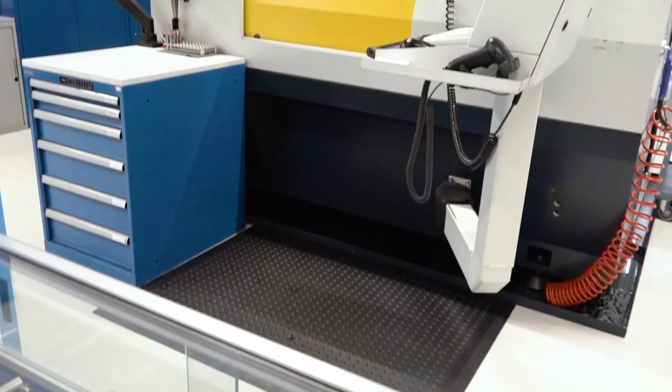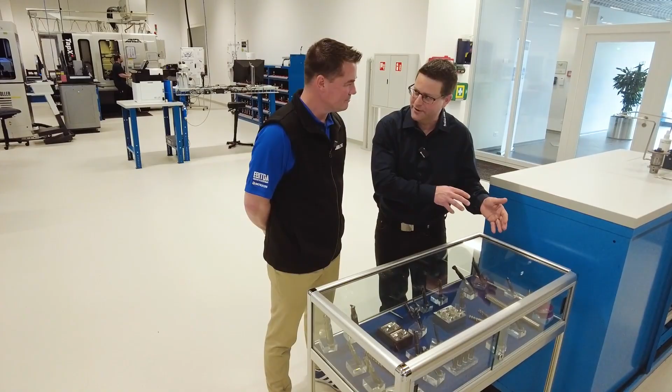I'm already seeing what looks to be dozens of grinding machines, which is the core of what you're doing here. Solid carbide is our passion for precision. You see different tools here, mostly different diameters and lengths, but more the bigger ones. So here it's really in action with powerful grinding technology on these Rheinecker machines. You see how we produce these tools: first there's always a rod, we put it in the machine's clamping system, then we go with the grinding wheel in a slotting process. The main material of the tool gets removed, and then finally we sharpen and finish the front part of the tool. The other ones with a lot of teeth are finishing tools. We grind such a tool for about 60 minutes - an hour for one tool. There are other ones we produce faster, but it's really different here.

I come from the machining world, and currently we discuss all the time about done-in-one operations and reducing cycle times. Are you doing the same thing inside the grinding machines - putting in raw material and taking out a finished cutting tool, doing your best to combine operations and cut cycle times, say from 30 minutes to 5 minutes? Are you doing all that to keep production up with demands, since you guys continue to grow globally?

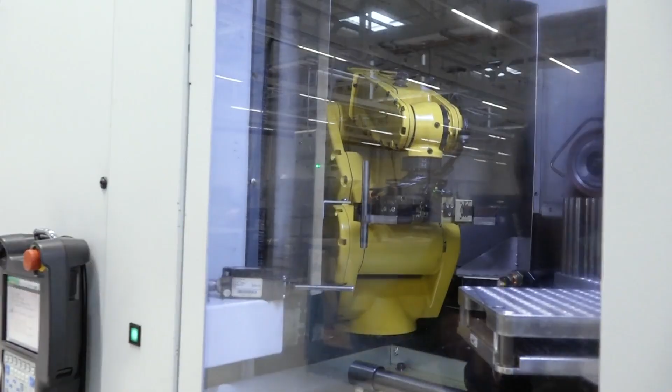Yeah, absolutely, it's important. We're standing here in the Switzerland production - the salary is part of the price to produce out of Switzerland. Most of our products go out to Europe, the United States, China - I have international competition. Producing out of Switzerland is expensive, so we have to optimize our process. Therefore automation is really important. When you look at a machine like that, you see the robot still holding the rod, prepared for its operation. At the back side we see the different grinding wheel packages. We've optimized during the last years not only the grinding strategy, but also the grinding wheels - the metal bonded wheels that we can dress with EDM technology. That's really important.

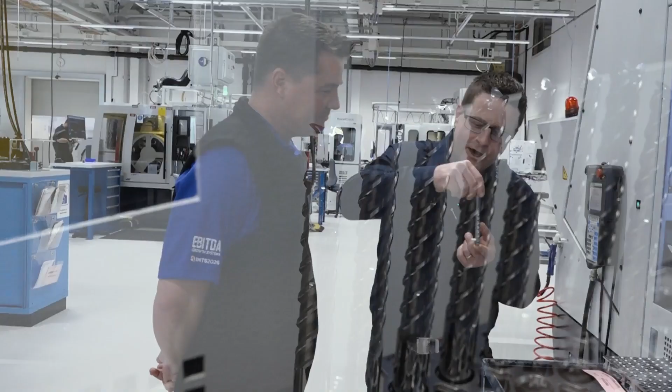It's really important that we are performant with our grinding strategy. Stefan, coming from a machinist background, in my younger days I would certainly hesitate to utilize this tool at full cut. But you would advise people to use the whole thing, wouldn't you? Yep, absolutely. And that goes into your strategies and quality as well.

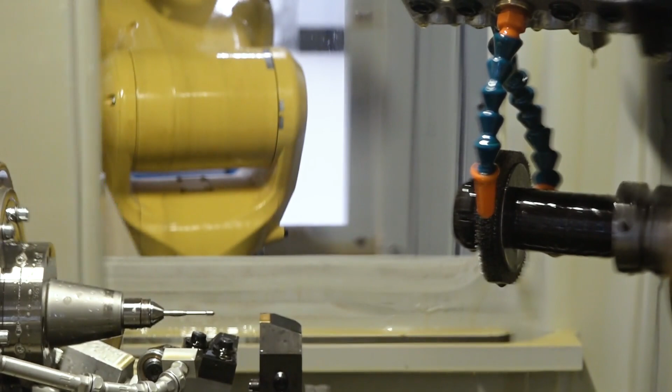The grinding part is one thing, Tony. The developing before, that's the whole story - to create a tool which is able to do that not only once or twice, but every day. What that means is I have to offer the product also knowledge - how you have to do that, the strategy, the programming, and all that. We will see that later. That's a main part of Fraisa's intention: giving not only high performance products, but also knowledge on how to use the product.

Stefan, that is one of the major details I want to talk with you about on this tour - the in-depth wisdom that you and your team have here that you provide to your customers. You have milling strategies, you don't just offer a cutting tool. I used to get cutting tools and have to figure it out on my own, but you offer milling strategies.

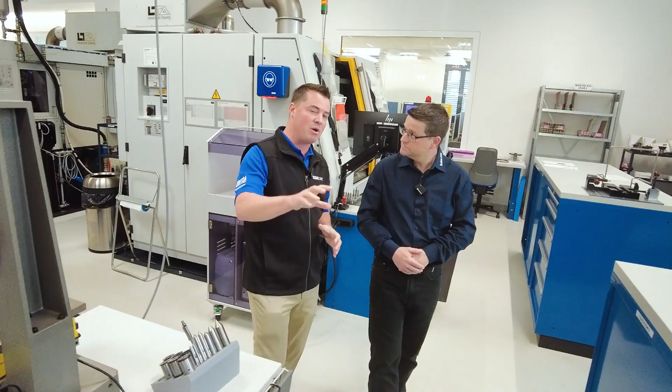Now that's a segue we're going to talk about in just a minute, because I want to step back to the importance of automation. You've already pointed out the robots - I look around and see them everywhere throughout the facility. I see a few people here, but a majority of those machines are running on their own. What do you think is the importance of automation here?

The importance of automation is for sure the infrastructure, but also products that can integrate into an automated production. So in development I still have to think about how I can produce this tool, in which tolerances I have to be really precise, and where perhaps I have a bit more flexibility to increase the tolerance. Focusing on production development is really important.

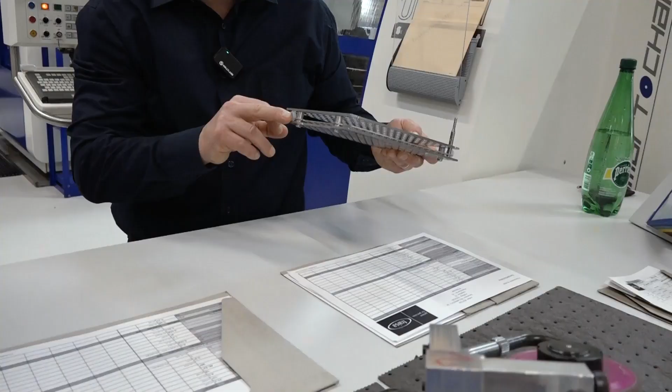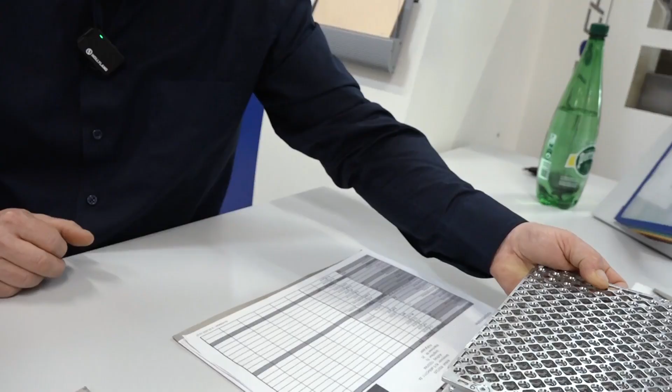We invest a lot of time yearly to make automation better combined. You see here, for example, our smart pallets - perhaps we go over there and see that. So from the beginning of a production, with its smart pallet here, you see the RFID chip on it. The tool rods get prepared beforehand, also with the robot, in the smart pallet. From the beginning I know exactly: this is this tool, this is this order, the machine knows it, and finally this pallet goes until the end of production with the tool. That's also one part of automation.

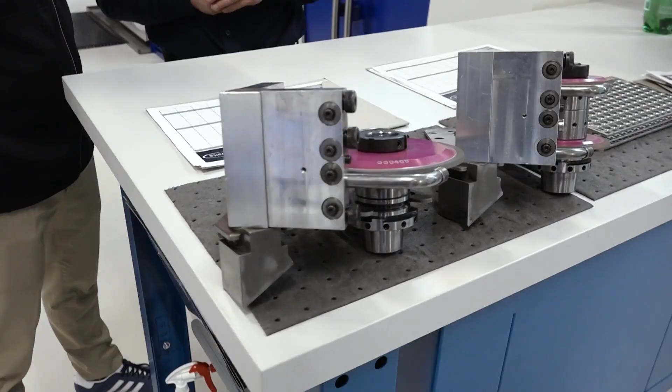And for sure you see here also the grinding wheels. The grinding wheel is such an important element of our production - for the quality, for the wear on a grinding wheel, the stability of the process. All those combined finally make automation even more performant than we've had in the past. Truly a great answer, Stefan. Thank you for sharing that.

Let's slide over this direction, we have so much to see today. I want to go back to what I segued to before, because when I think about Fraisa, I think about a company that started in 1934 - over 90 years of development, and you guys pride yourselves on being the best.

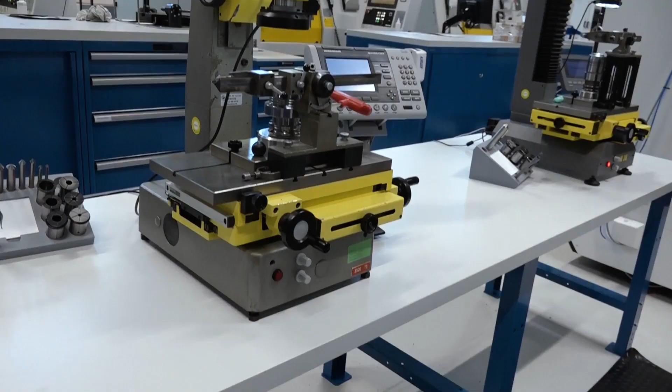This quality product, from the design, from the automation, to the coding which is so important, to being able to measure everything, because you can't make something if you can't measure something, right? Absolutely. And your philosophy, stepping back to what we brought up earlier, is you want to make sure that when people work with you, they have a full solution.

You've created the ability on your website to pick a tool and understand the tool and understand the process. It's not just about giving you a call and saying, hey man, I need a 10 millimeter tool and I'm cutting aluminum, or as we say in Europe, aluminium, right? But it's not - we're not doing that here. You are giving a full solution.

Can you describe to the audience what 90 plus years of dedication to that understanding and partnership does for anyone who invests in a partnership with Fraisa? Yes, thank you very much, Tony, for this question.

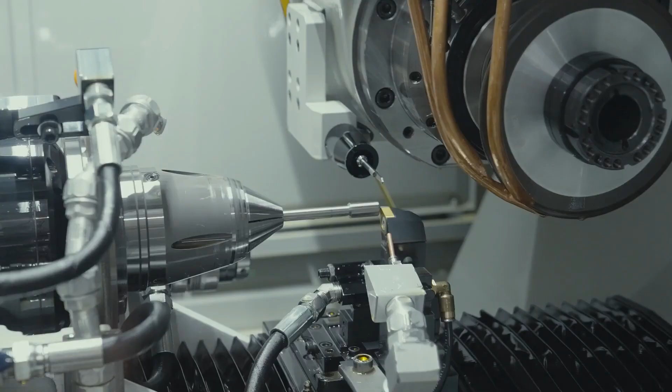And so the basic of all that, as you said, is 90 years of experience and culture. For sure, we began with the technology, the tool technology, the performance. That is the base. So a tool has to work, and it has to work daily and annually, always on the same performance level. But as you said, that's not enough.

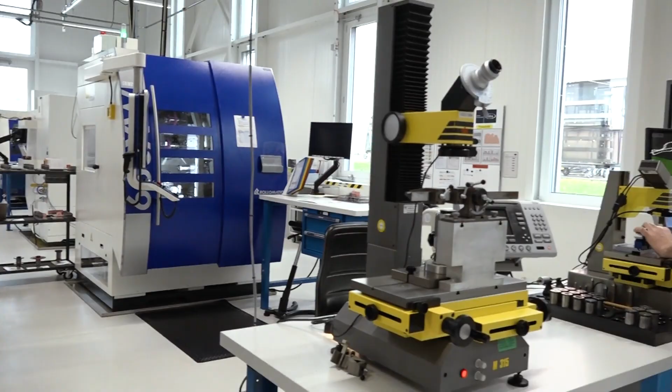The performance level is today so high. The question is always how we transfer this performance level to all our customers. So we have to give knowledge with it, and that we integrate in our tool expert, in our tool software. So therefore we invest also a lot of trials, of developments to do that. But finally we need also partners to create this whole story, this milling system. We need partners in automatization, in production technology, but also in applications technology. We can't do that ourselves.

And one part, most important part, it doesn't help if we are freaks and specialists herein. No, we have to transfer it to the market, and therefore our sales, our application engineers, daily by our customers, guiding them, helping them to implement those products and this quality and this performance, understanding what are the needs and the problems of those customers, helping them and giving us also feedback. So that's a sharing of knowledge, of culture, of willing to go together into the future. And that's what we are standing for.

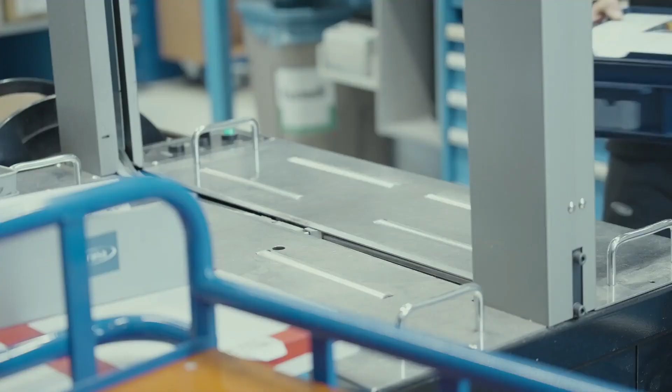So we are really open to discuss always transparency, what is to do, where we want to go, where perhaps we have certain opportunities to work on. And then we go there in and always be also critical and validate ourselves that we can guarantee quality.

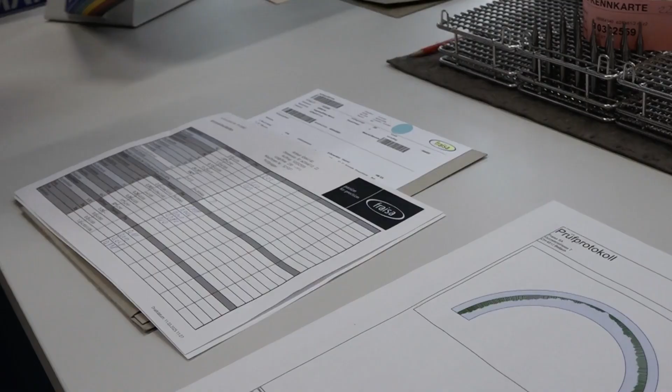I can give you here, for example, this tool. This is now a high precision ball nose tool. It's not the most precise one we do, but you see here the tolerance that we've got here. We are talking about microns here. So the radius of the tool is plus 3 micron minus 6.1, and look now here, as measured it...

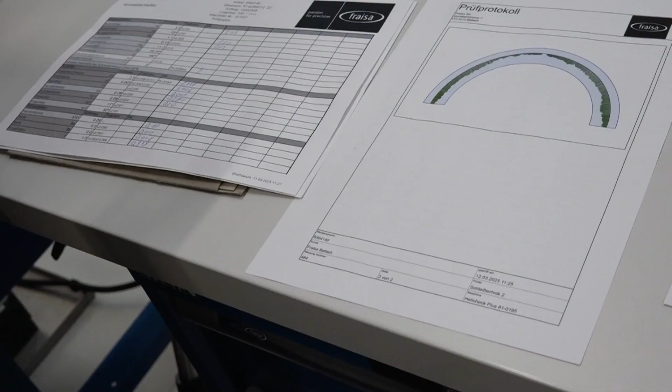That's also a Fraisa element. The tolerance of a ball nose here is over the whole nose, and you know when you have two teeth, it's really difficult to part in the front of the tool, guarding this tolerance. And look at that, how many measure points they produce here to hold exactly this tolerance. For our customers, it's so important that they can get finally exactly this diameter, program it in their CAM program, and they know, yes, the mold finally is especially in this quality that I have to do.

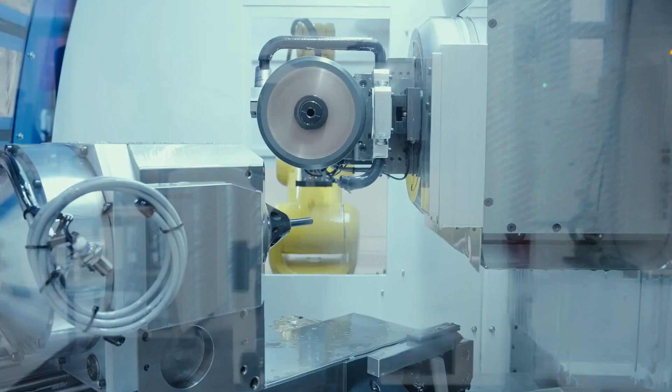So that's also a service that we give with our products. For sure, the performance, the tool lifetime of the products has to be state of the art, but here that's an additional one.

Something I want to slide into, because we're going to head in the general direction of grinding, and that's another one of your areas that's quite fascinating to me. But along this journey, I want to talk a little bit about your eco-friendliness and your awareness of energy consumption.

Energy consumption has been an issue around the world over the last few years, as they keep doubling, tripling, quadrupling the overall cost of energy. And it is very important to you guys here at Fraisa and some of the partners here in Switzerland to do everything you can to reduce costs. Would you mind describing what efforts you go into when you design a cutting tool of maybe reducing energy by 20% or 10% or 30%? And can you translate that for the audience so they understand exactly what that 20% means to maybe driving a car or something like that?

Yeah, great. Yeah, absolutely, Tony. Thank you very much. That's also a personal intention to reduce energy consumption. And we have still a lot of possibilities to do that. I can give you an example.

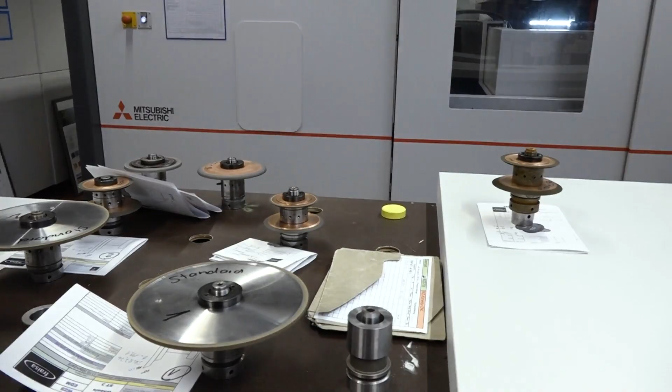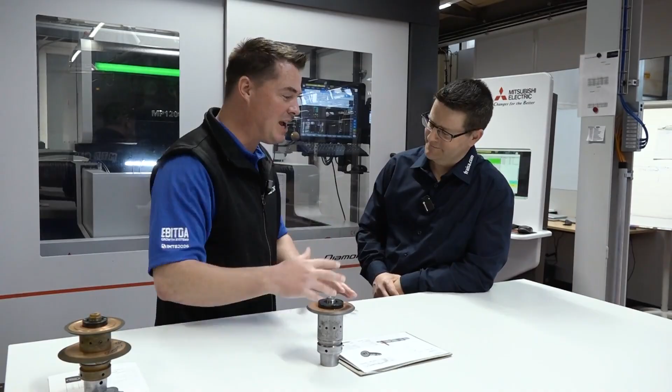You're far more familiar about this than I am, but I know that the concepts of machining a part and making a tool have a lot of similarities. You're constantly trying to multitask inside a machine to create new geometries, for eco-friendliness or part production or longer tool life. In this industry, there's a constant competition between software, cutting tools, and machines. At some point the machines are ahead, sometimes the software is ahead. Currently, cutting tools are ahead of everyone, so everyone else is trying to catch up.

So instead of making the coolest and best technology, what you are doing is really trying to figure out how to make these tools last longer and how to make more of them within a machine in a shorter amount of time. And that's the concept of this whole grinding area, isn't it?

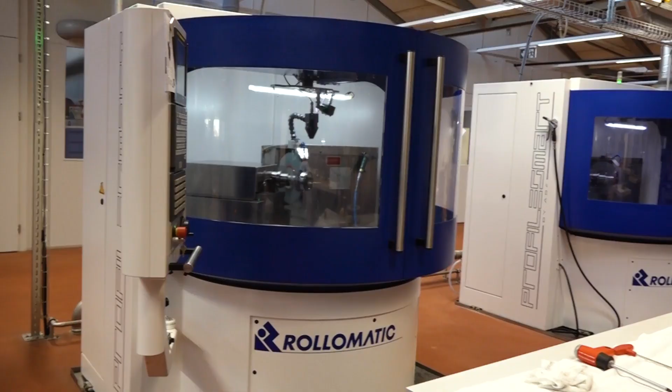Yeah, absolutely. The grinding wheel and the perfectly dressed grinding wheel is the base. You saw all the machines and tools there - without the grinding wheel, they don't work, nothing happens. That's why this department is named the Grinding Wheel Competence Center. The dressing of a grinding wheel, the quality of the grinding wheel is so important, because you want to hold the tolerance, those microns, during the whole series of production of those end mills.

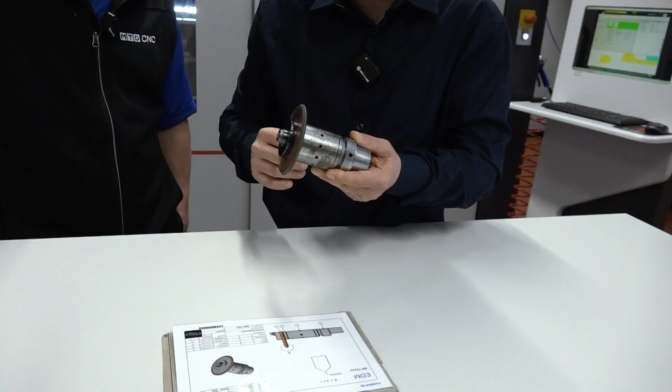And therefore, those specialists have special grinding wheels also developed with our partners. Their partnership is important - we can't do that ourselves. We receive the grinding wheels, metal bound grinding wheels, or dual grain grinding wheels. This, for example, is something really special.

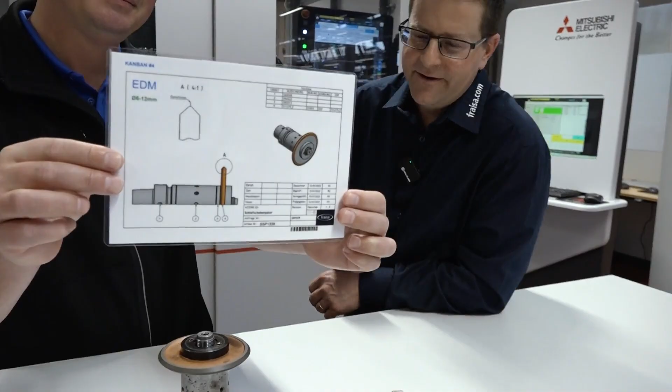This is a grinding wheel for a chip breaker, for a special chip breaker system that we developed. I will show you that afterwards on a machine, and I have high-speed camera sequences showing you what is going on with such a chip breaker. But look at that - that is such a special form of this chip breaker. The transitions of the chip breaker are so smooth.

And we developed this, I invested about 7 years - 7 years, I lost also a lot of my lifetime years. But you know, we are all fascinated, so I invested that globally.

But it's so interesting - you see here now a grinding wheel, you see it in a machine, and you will see then the result of the product on a machine. The customer is satisfied because the right chip length in an automated machine is elementary important, because otherwise you can't machine safely, because the whole table is filled up with chips. So you see what a systemic development, production, and sensible story means - it begins with the grinding wheel and ends with the customer who is satisfied because his production can run automatically.

Amazing, amazing. All right, let's slide over this way, Stefan, as we move into an area which I would lightly describe as the beginning of the end process, where we're starting to clean it, where we're starting to put on coatings, where we're starting to package it, and we're going to show all this.

Would you mind describing your company culture here as well? Because you've recently won an award that I would describe as for the people, by the people, where there's an anonymous posting - and you know how mean people can be online when they have no regard for anyone because you don't know where it's coming from. Yet you guys won that award because your culture here, you really take care of one another. Yeah, absolutely. Look, you see a lot of machines, you see a lot of technology, but the core is still the human, the teamwork.

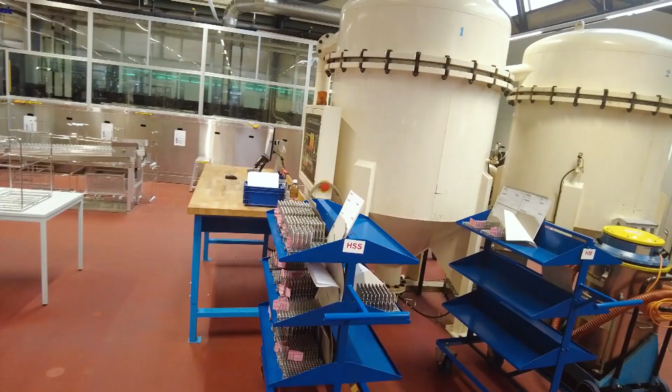I can't do that myself all alone. I need everyone setting up the cleaning process. For example, this machine has a special developed cleaning process with over 13 cleaning steps to guarantee that the tool is really well cleaned before we coat it. So I need partners, I need humans, and it goes on into the reproduction, so that I can guarantee every day the same quality of performance.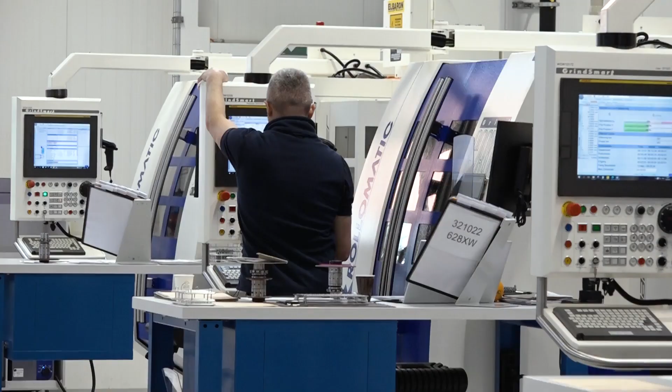I need humans. Also the measuring, I have to develop the measuring method. I need people that can interpret the results of what they're doing. And therefore we need teamwork, transparency, but for sure we also need process. That has a lot to do with culture, Tony. Be open, be transparent, talk about what's not going really well, but do that always in a manner of fairness and respect.

Very, very well said. I had to take a moment of silence listening to you because I love the culture here. You say it out loud, but I can see it in all the people around as well. Every time you walk into a room, people are smiling, working diligently. They look like they love their jobs.

But let's segue a little bit from the culture and people to actually what the audience is looking at right now. In this room, we can't touch a thing, can we? No fingers, absolutely. Put your hands in your pockets, right? You're absolutely right, Tony.

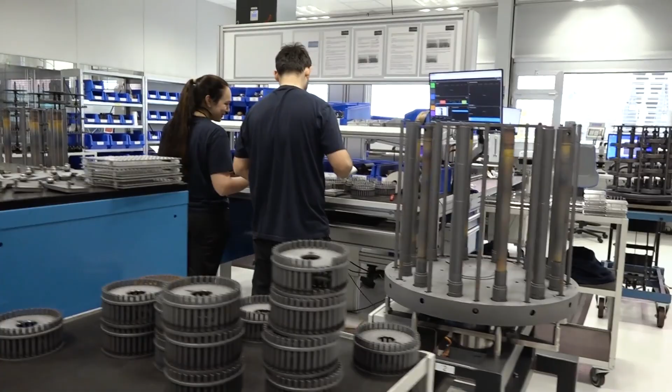So here all the colleagues are preparing the satellites to then finally apply our high performance coatings on a tool. You see they wear gloves here, because if you touch a tool, even your fingerprint can damage a whole coating charge going through this room. It's so delicate, you can't imagine how delicate it is when a tool isn't cleaned really precisely.

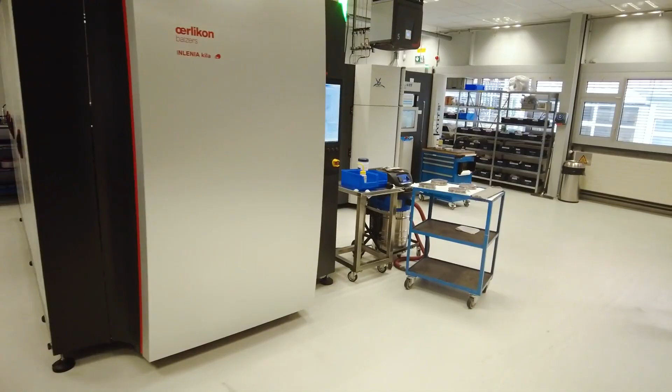You don't see a lot here now, but we are in our coating department. You see different machines running, applying our coating recipes. A recipe uses several hours to put this coating on a tool, and the influence of a coating is incredible—for the tool lifetime, for the performance, and also for the reduction of energy consumption, because modern coatings are so thin and so fine that they have a big influence on the evacuation of chips out of the tool. So we invest in our own development, for sure also with partners, but that's a core element of our production.

Just for fun, if I was to take 100% of a process, what percent of that would you label the importance of the coating? It's a really big one. Yeah, it's a really big one.

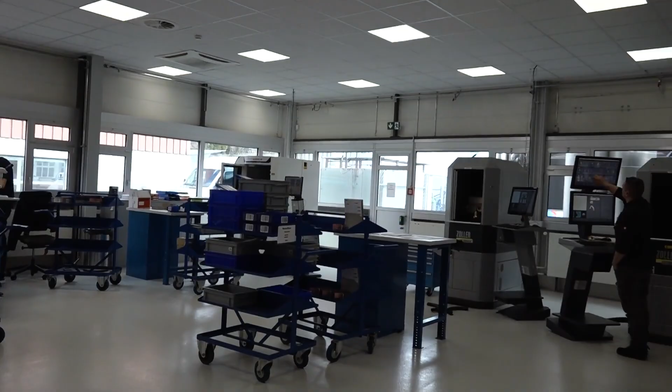For sure, we have the substrate, we have the geometry, and we have also the coating influence. So if you don't have good raw material, as always, then you lose performance. But a coating is a main part, I would say. I can't say directly in a percentage—it depends also on the tool type, the machining material. But I would say in certain cases it could be 50%. So really impressive, the influence of the coating.

And from the outside looking in, Stefan, when I think about a process that certainly you know more than I do—20 plus years, and the company's been around for darn near 100 years at this point, and by the time some people watch this video, it might be even more—but when I think about that, geometry has been around a long time. There's a lot of mathematicians out there, a lot of science that goes into these certain angles presented to make the right cuts with the correct materials. But I almost feel like coating can be a secret sauce as well. Maybe that area is a piece of why you're so globally successful and known as, if not the best, one of the best cutting tool companies in the world. Is that a correct assumption?

Yeah, yeah, absolutely. Additionally, I can say that the geometry today, there are still secrets. I'm developing, I'm searching on it. And we always say that the devil is in the detail. You have to go into the detail. You have to understand the detail.

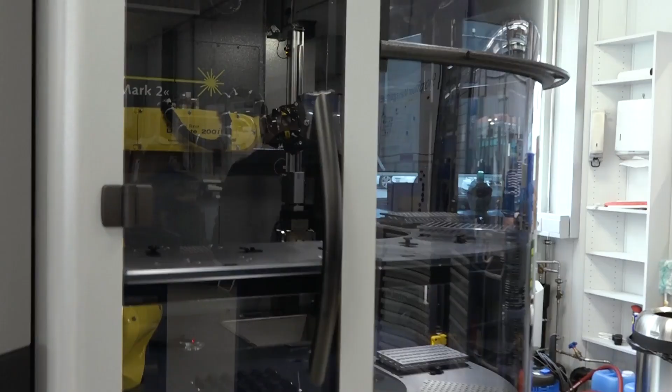And therefore, we've got also here those measuring methods. I can measure that with a 3D scanner. I would say more macro geometries. I can compare them. But on the other hand, we've got here really precise

measuring machines. I can measure here less than a micron, because I have technologies on the geometrical side today. They are elementary, have an elementary influence, a supporting chamfer for example of a tool, which is really complicated to measure and to reproduce. And there the geometry is the big influence.

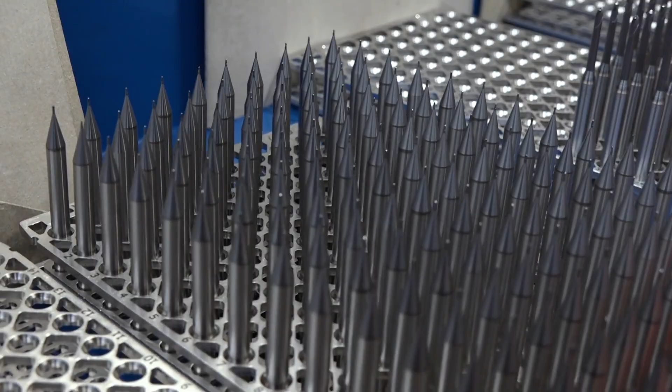On the other hand, when we are machining stainless steel, titanium, or nickel-based alloys, the coating is really important also. So I think it's important to know for which application, which tool are the key elements. And we talked before about efficiency also in the production.

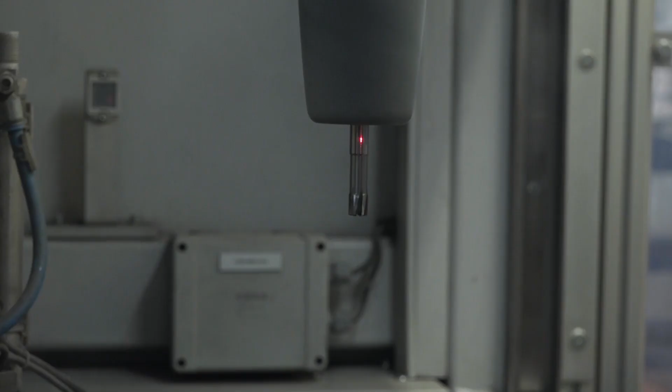Always making tolerances smaller is also not a good way. You have to know where it is important and where it isn't. So like there, we can also optimize the production of tools.

This is why I bring people like you on camera, because you are the expert and we get to learn so much together. Yeah. So this is the quality department.

We're gonna head over to packaging, but I bet these guys would make the argument that they're the most important people here, right? They're really the quality department. I see them smiling. Yeah. That's the most important. They know the importance of what they do. They're really important. All right, packaging.

Man, I gotta be honest, when I did packaging, I was doing it by hand. You are not doing it by hand. You were doing everything within a system, and you're even being eco-friendly about that here as well. Can we walk through and describe the process here?

Yeah, absolutely, lovely. Look at here, the tools are coming. They're now finished, they're coated. Look at the golden shining tools here that you're seeing. I think that's a diameter 3 or something like that.

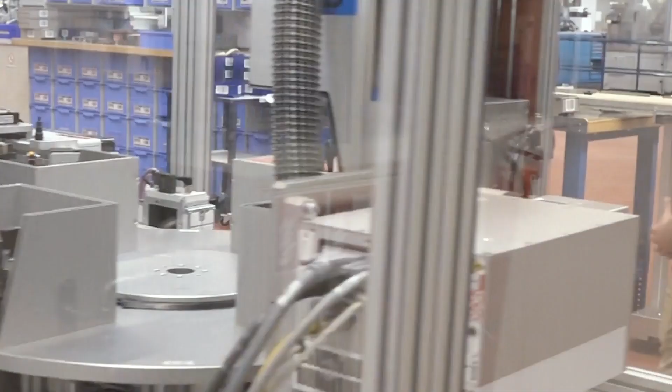The tools get picked by the robot here, and they go now directly here in this part of the machine. That's the laser. The laser is putting on a unique number for every tool. So here I know finally this tool has its own number, and in 10 years when it's still in use, I can say okay, it was produced on the 13th of March here.

And then it goes on through the station here. This one is now a little bit of a special one. It goes into the packaging here, the blue one, into the package, closes the package.

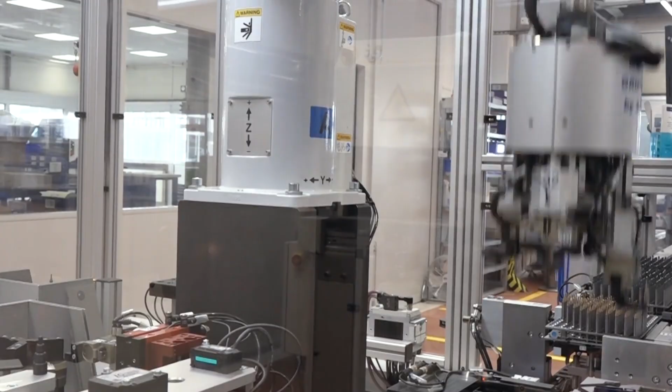You know, while we move on to this next section, I can move almost as quick as that robot. How about you? Yeah, well, I'm almost as quick. I could probably do close to the same. Obviously I'm kidding, that thing is flying. It's flying, so that's really fast.

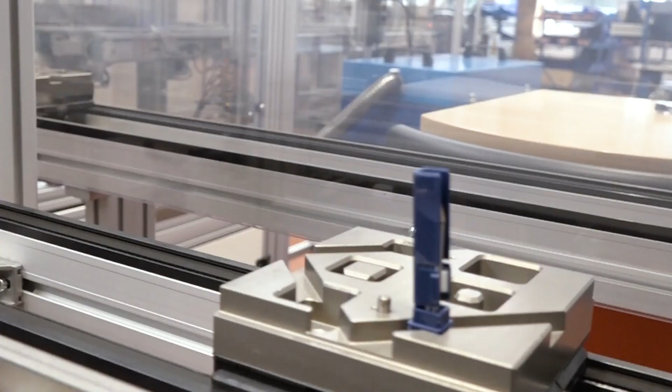He doesn't have to go to the restroom and he doesn't stop in the evening. So he works on, and that's the big difference. Even if the robot is a little bit less fast than you, he works. And yeah, that's also boring work. We're always saying here, Tony, the boring work has to be done by a robot. Dull, dirty, dangerous, right? Absolutely.

And we have a lot of other stuff that our good colleagues are still doing here. So, eco-friendly packaging, correct? Absolutely, eco-friendly packaging, recycled packaging.

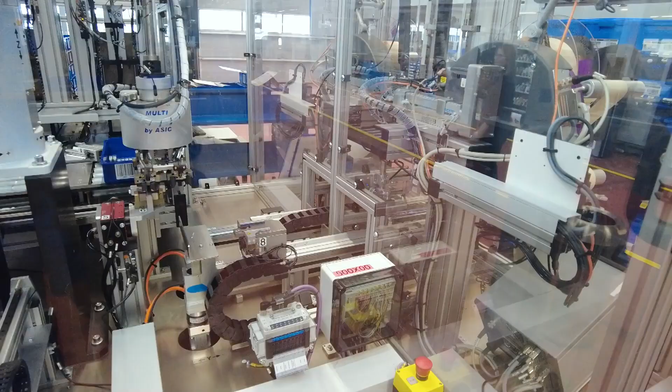Well, it looks like we're getting to a completed product, which means we're probably getting to the end of the tour as well, as you've taken us all the way through. And I see that when a product does get completed, all the data is collected from that as well. Absolutely, all the data for every single product is now finally here also saved, stored in a database.

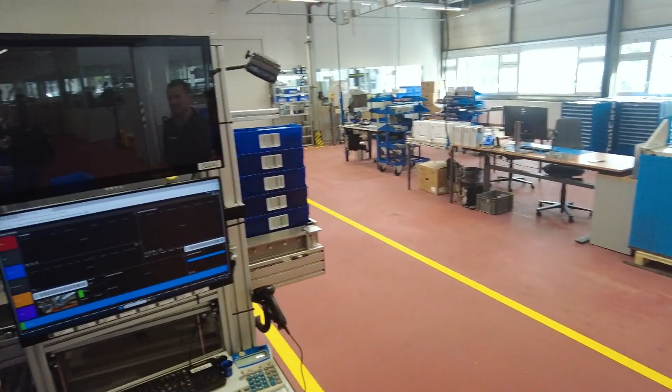But Tony, yeah, the product is still here finished. So the package here goes then finally on a stock. Our customer can order the product here.

Well beautiful, packaged, but it's not yet finished, Tony. It looks finished, we made it to the end of the factory. No, what am I missing?

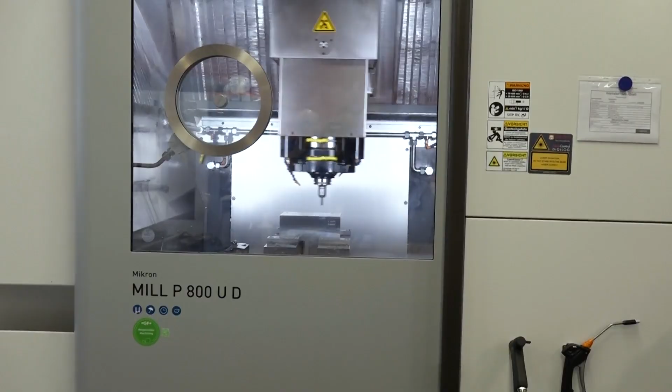No, here it begins, Tony. Hey, what we want to do with the product sitting in a packaging, we have to machine with it. And what does that machining mean? Machining means also, Tony, that we need good employees, trained employees, new colleagues learning how to machine.

You will see then that also CNC programming, you know it well. A little bit. Yeah, I know that you know it well. So we need knowledge, and therefore we have here our department building up new apprenticeships here.

One of my favorite topics, brother. Yeah, I remember well in the 90s when I had my first CNC experience.

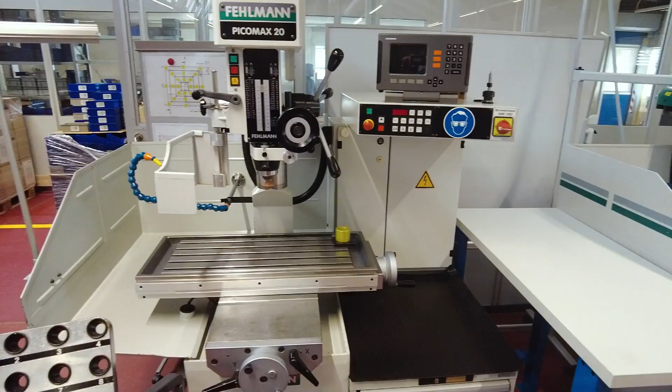When you look here, Tony, you see also conventional machining, which is how we learned and we've kept it around. You feel the chips, drilling and turning and milling, also conventional. This is important still, that you have a feeling for what's going on, the forces, the temperature, perhaps also the mechanics - what it means when I have to turn a wheel and the material sticks up or what else. So those colleagues learn how to handle all that, and for sure also grinding competence, but also CNC competence here.

Stefan, I think this is where we stop for now, but I think you have an entire machine shop that we have to dive into, don't you?

Absolutely, and that's my favorite area. Oh, I love that too. I like the production, that's necessary. But what's more beautiful than machining, making chips, understanding what's going on, and feeling the power that we invest in a tool. So Tony, I would say we go over there into our lab and make some chips. Absolutely man, let's go take a look, I'm very excited.

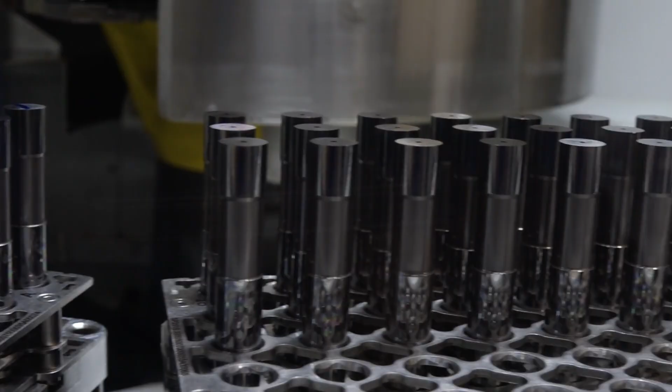Yeah, it's important that you know both. It's also important that you know what's not good, because then you can prevent customers from setting up those products. You saw we produce really nice tools, and without developing, it's not possible today. You can't develop a tool today on a green table and put it in a catalog as a standard - that's not a good idea. So therefore we invest a lot of time in this department, R&D - really strategic trials, really analytics. Not just playing around the same way every day.

Stefan, I want you to clarify a rumor for me. I've heard that you guys actually do R&D for 2 to 3 years into the future to make sure all these tests are done correctly before ever releasing something.

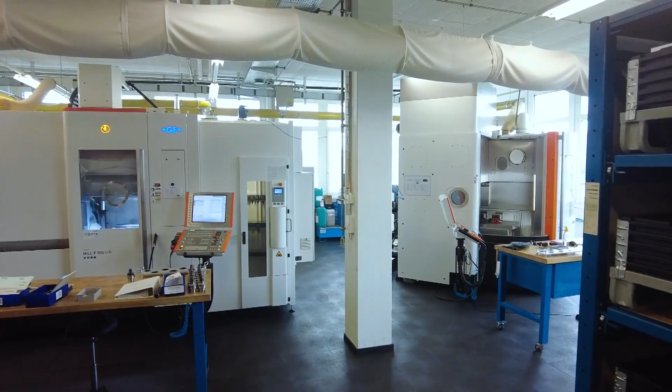Yeah, absolutely, that's true. I'm still finishing now, beginning of 25, the products for 26 I still develop. I'm working on 27, 28 developments now. It takes time to understand. A product I will show you afterwards on a machine there, I develop for 12 to 24 months, and I make about 70 prototypes to define the product finally, to reproduce it, to know the technology - because I've not only diameter 10, I've got it from 2 up to 20, from short to long.

You saw the 6.3 times diameter over there. That means you have to test it, otherwise you're not going to have the feeling when you put it on the market, and you don't sleep well at night. No, I couldn't imagine throwing something like that out into the wild and saying good luck. Yeah, we think it works, but you go ahead and spend a lot of money on our tools and try it out for us - that's not how it works.

Do you have a demo set up over here that we can take a look at? Absolutely. Here machines are machining for a certain time, the tool is in action, and then after a while we look at the wear. Wear analysis is still one of the most important things. You hear the noise, you can measure the consumption of power, force and all that.

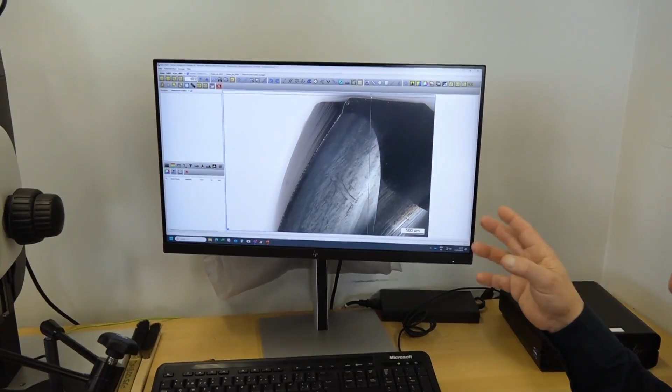Look at that now - 90 minutes machining in construction steel, which is not really easy to machine. You see the wear on the tool - look how regular this wear is. You don't see a lot of material adhesion here. So that's what we are doing - we're machining, comparing tools, understanding the influence of the geometry, whether it has to be positive or not. And I told you in the production, Tony, about this chip breaking system for the automation.

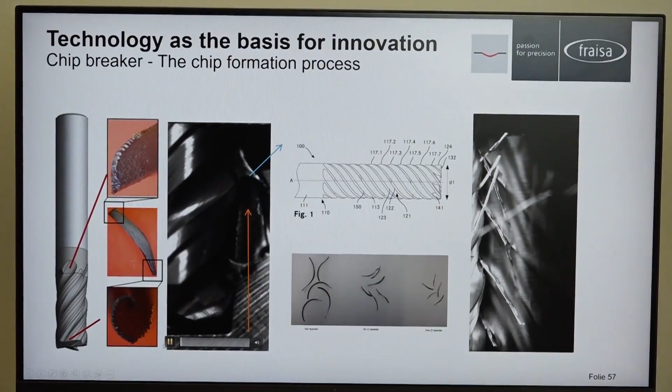So I've got here an example to show you a little bit what that means. What we are seeing here is a tool, and you see here a chip built in the front part of the slot and the end part of the slot. Look at how the chip gets formed.

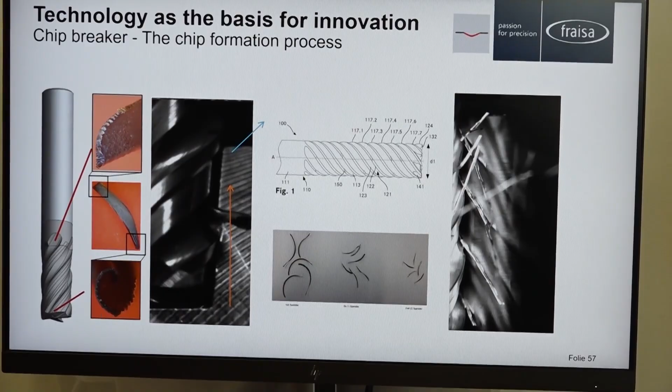That's so impressive. It's incredibly impressive - I have a fast camera to do that. You must, I was thinking real time. Obviously that's in jest and humor. That's a really powerful camera to be able to collect that data. Absolutely, up to 200,000 pictures per second, Tony.

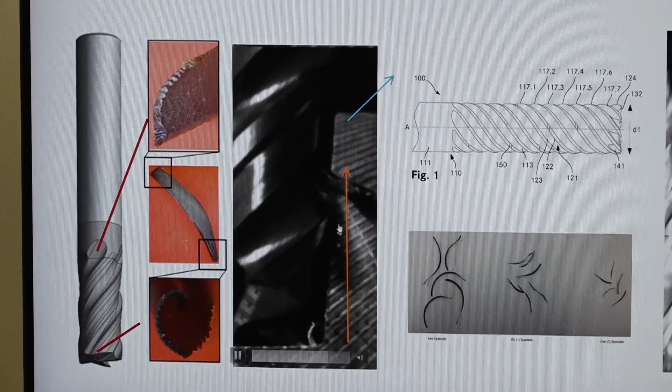So with a setup like that, really specialists can do that. That's really helpful, you see a lot of things, but now look at that - the chip goes up in one way, so it's a long chip. So therefore I have to integrate a chip breaker, interrupting this process, building the formation of a chip.

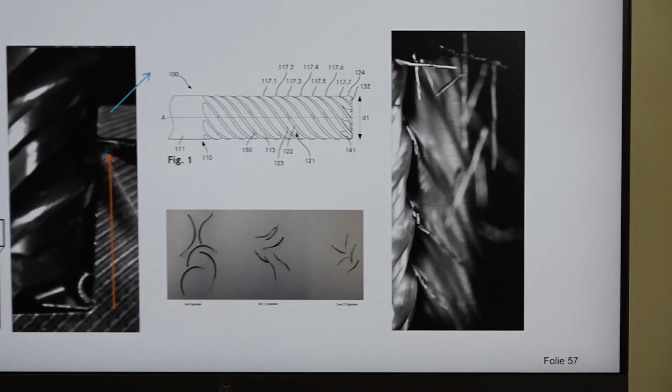That is what we are seeing here on a second video. This is also a long tool in action, look at that, and then here you see the chip breaker - the chip gets broken, a new build gets up, and like this we can cut the chip into several pieces. That makes it more efficient to remove it out of the workpiece, out of the table of the machine, without interrupting the conveyor for chip transportation.

So technologies like that are really important to understand what's going on. Would you say that recutting chips is one of the quickest ways to wear down a tool before anything else? That's why we're trying so often to either get coolant where it's supposed to be, use chip breakers, but regardless, we're trying to remove that material and get it out instead of rubbing or cutting the same chip twice and creating that dullness in our tools.

Yeah, for sure, that's for the cutting edge, once again, going through its own chip securely. That's also the reason we integrate in most of our tools those lubrication channels, and also the form of the chip - that's really important for a profile tool, for example. They can hook their own chip, and that is then finally a really bad situation when a chip can't be removed. So yes, that's our part here, thinking about and looking at the chip formation - really important.

I will show you afterwards a photo you will love. I love chips, Tony, I even go diving into the chips because it's such an important part of our work. Perfect, let's continue our tour. R&D is so fun, and I would pay to see you dive into a bucket of chips, by the way. Since you've already brought that up on camera, I'm going to hold you to that. We're gonna try and make that happen.

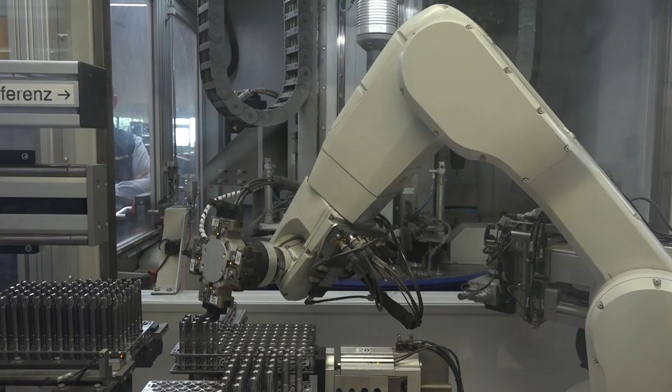As a part of that, I've heard that you also do a retool - you make sure that if a customer invests in your high-quality product, they can utilize it more than once. They can send it back to you, use it 2-3 times. Now historically, when I was ordering tools, I always hesitated because I was told I was losing quality. But I'm not losing quality with you - I might lose a little diameter. But can you describe your retool process?

Yes Tony, that's a really important discussion here. You see, we invest such a lot of energy producing those tools, and therefore it's important that we can use this value we invest several times. It's its own part of the tool development that we develop, also the retool - the resharpening on one hand, but also the recoating, reproducing this 100% performance guarantee that we give to our customer. We do that with our colleagues in Germany, where we make this retool process and can guarantee this 100%. I'm absolutely with you, because the diameter is less, the stability can't be the same, the deflection of the tool.

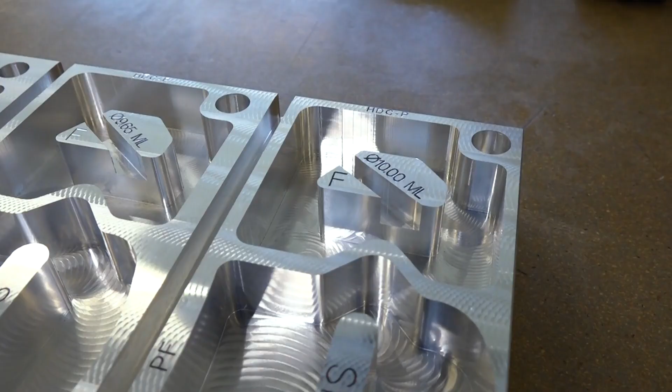This is an MFC aluminum tool, really performant, and you see the different operations: roughing, high dynamic cutting, finishing, super finishing. Then we go to the next one, the 9.65 - it's once reground, the diameter is less, and we test it with the same parameters and compare this performance. Finally it goes down to 9 millimeter, meaning 10% of the core of the tool is less, and even then we can guarantee the same performance, the same quality.

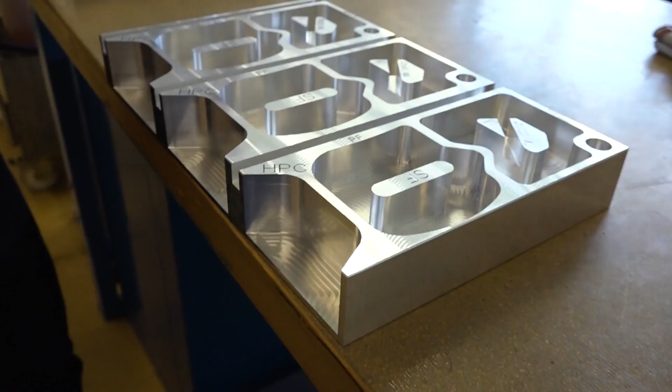Look at that shining, bright surface quality that we reach - we're really proud of that. So that's a guarantee we give to our customer, and we test it. It's not only something we're telling, it's really something we make seriously - testing, and then finally guaranteeing to the customer this 100% performance guarantee of the retool.

Not only can I see your handsome face in the reflection of a super finish, but I'm saving a bit of money as well by utilizing this process, aren't I?

Yeah, additionally - that's a value we're giving with our tool. Regrinding a tool makes the price 30% less compared to a new one. So when you make the total cost calculation, you see that your price dramatically decreases, and the value is once again more sensible, also economically sensible.

Yes, and it keeps the relationship going, I would imagine as well. If I'm going to invest in your product and invest in retool, that means I'm going to stick around for a little while, right? But you just showed me 2 to 3 opportunities for me to continue working with you. I'm saving money, I'm working with an amazing company, and I'm continuing to build that partnership. There's so many wins to the retool program.

All right, now we're in production, and these guys, I think they all want to be on camera because they love the camera so much.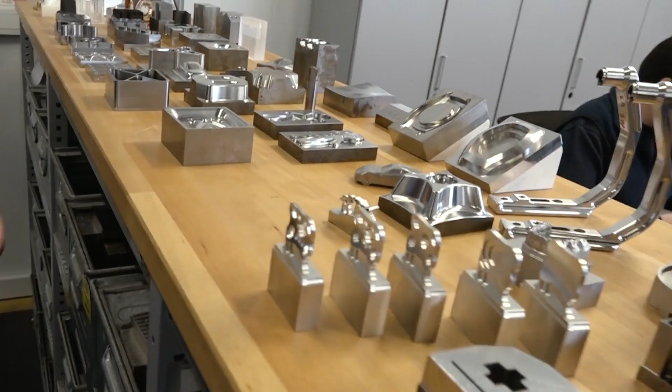As I look around, some of them just keep missing and I don't know what's going on, but some of these are really cool. Look here, we machine high-speed steel - there's 66 Rockwell here. Oh my gosh. Yeah, we go through it like butter, that's a high-speed steel coated. That's incredible, that is a fun project.

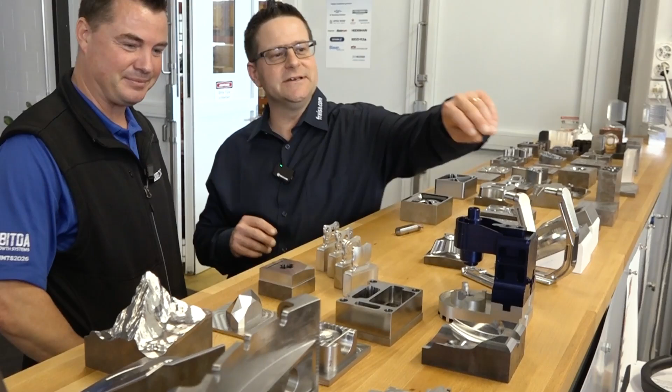Stuff like that here is also - this is the aiming device project we did together with our partners, especially Regofix was integrated here. So also a Swiss project we've done, the Matterhorn. You have to visit, you know it? I do, I've seen this at my friends at Regofix - in fact, they just made me a small version of this.

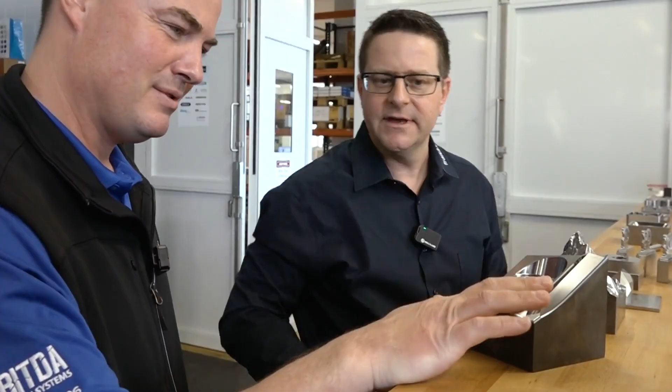Yeah, you can increase it, decrease it as you want, but we machine titanium too. Oh, look at that - look at the quality here, die mold. That's nothing polished, that's all machine - straight off the machine, no polishing.

Wow, impressive work. So I see you've already mentioned several materials that you've plowed through with your cutting tools. If we spin only slightly, I see a whole wall of material, which I'd assume is your investment in the testing process to make sure you're testing in all the different materials. Absolutely - in our tool expert cutting data software, more than 10,000 materials are integrated there, with material comparison.

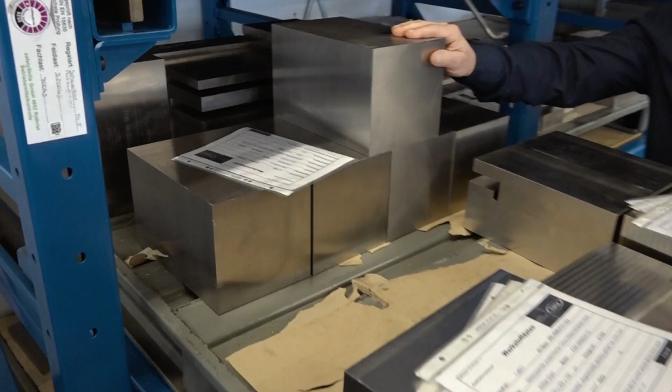How do you want to build up this competence? I have to take up quickly here a titanium, stainless steel - here this is aero aluminum, for example. So I can take it out, put it on a machine, stainless steel here for example, or a block of titanium, making tests in it, understanding what's going on for sure. That is a huge cost component also.

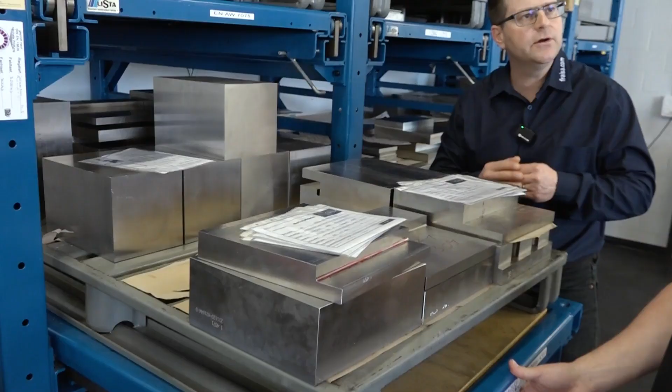But for us it's so important that we are understanding what's going on, and finally then also helping our customer be quicker and more safe in the production process.

What I'm realizing is that there are a lot of theories out there, a lot of beliefs. There's a lot of scientists that say my geometry will do a certain thing, a lot of coatings that say my coating will do a certain thing. And you guys say, well, let's put it to the test. Let's see if that theory is real.

And I like that, that's it. And then on top of that, if I look over my right shoulder and to my left here, you're going live to make sure everyone understands what you're working on and how they can embrace it also.

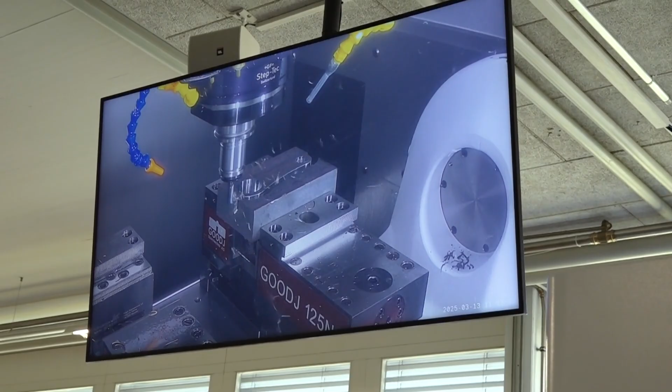So plug and play here. Plug it in, play with it, it works, it pays off. That is important, and we share this knowledge also.

So therefore we invest also from the applications technology for all our products here, from the small one, micro end mills for example, cylindrical ones, or this high dynamic cutting strategy, really interesting with highest volume, but also with a lot of challenge for the tool side. Up to 60 Rockwell here, you see a different range of tools, and for every tool it's the same process.

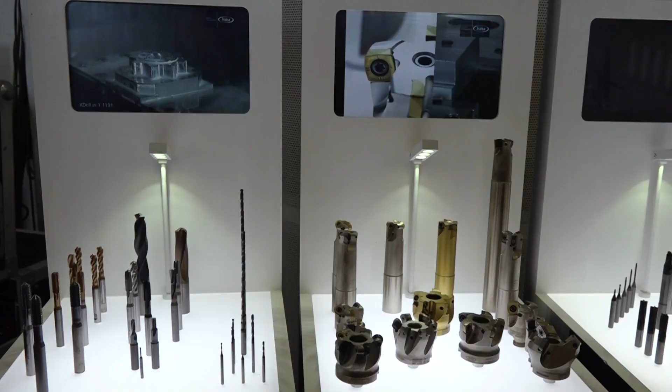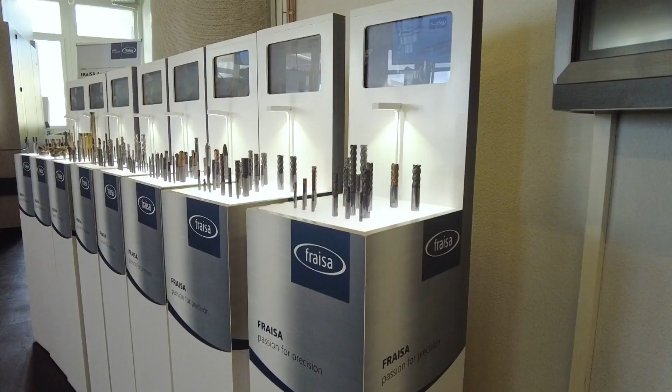Can I bring up something to you that's a curiosity of mine? It's the fact that we all know some of the wisest, most seasoned machinists we've ever worked with are starting to retire. And there's around the world this idea that maybe we have a labor shortage or a skills gap. I would make the discussion that you guys here at Fraisa collecting all of this data, because it takes years and years and years to truly understand what a tool is supposed to sound like, what the vibration is supposed to be, how to utilize it economically.

We've already talked about in other areas the reduction to be eco-friendly, right? But it takes years. You guys are doing that for us. So if we have a struggle bringing in these expert machinists, in time they'll become that, but in the meantime you guys can be the experts for us in our machine shops. Am I correct in that thinking as well?

Yeah, absolutely. That's an opportunity, but it's also a threat, a trap, so like always. I think it's important that we share more and more knowledge with our partners in the future, and that we understand where this voyage goes. Is it going, as many say, toward automatic programming, feature-based machining, all that stuff? But nevertheless, we always need data, how it works well and how not. And yes, there's a transformation of knowledge going on there, and we want to help hold and win new knowledge.

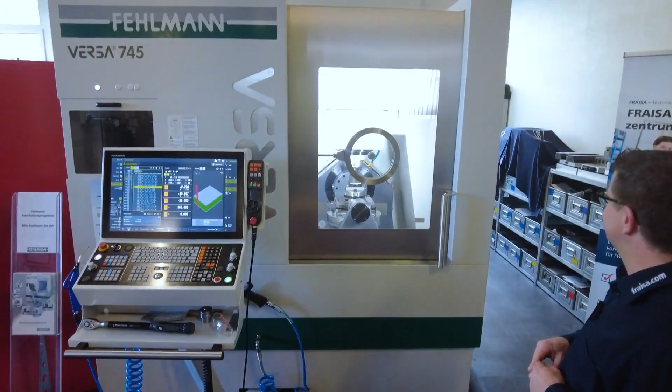It's a long one. You spied, Tony. That is a really long cutting edge, up to 6.3 times the diameter. And look at that, he's now in action. And you said, no, that's not possible. You can machine with a tool like that, and it is possible, Tony.

This is now a roughing process with this high dynamic strategy here, and finally we can also do finishing, and it's impressive. The tool then finally gets into a plunging. You have to show that when he has finished the outside contour in milling.

Look now the chip breaker. Look at the chip breaker. Look how small the chips are, how safely they fly away from the workpiece. So that was not only marketing, this is really the story. And now we have a look on it.

What are we getting ready to see? What's going on? Now he makes a small stop. Now he's ready, now he's gone. Now comes the plunging, and this is exactly what we discussed previously. Yeah, it's almost like we know what we're doing. We have a saying in the US, when someone says you can't do that, we say hold my beer, and then we do it.

It's kind of like what you're doing here, isn't it? Please be calm, lie back, have confidence. And yes, Tony, we know we are here on a technical level really, really high. He changed now to the high dynamic cutting. Look at the chips, how they come out - that is what I showed you before with the video.

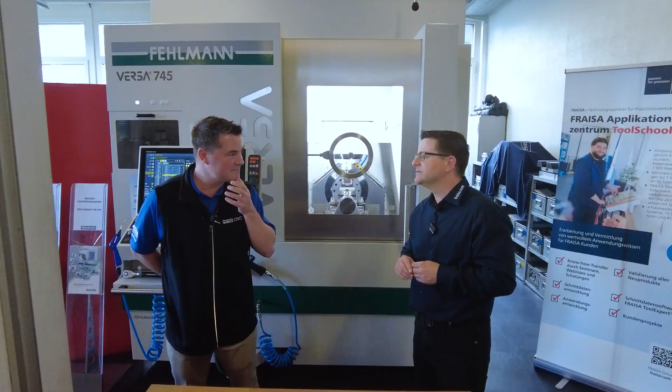It has to be with our culture that we are transparent, also internally - that's the reason we're doing validation of what we are doing. Can we hold that what we are doing? For sure, we learned also, Tony - not always we had a hit on a market, and that's also important that we discuss critically and make a lesson learned, coming step by step to this real story of what we are working for day by day.

And finally, the customer, I give him a call - hey, what's going on? That's working, it's working. So it's taking him by hand also for the future for new projects.

Well, let's slide right over here as we conclude this incredible tour. Personally, let me say thank you for allowing cameras in - it's not every day we get to come into this facility. I see that every machine is running from R&D to retool, to production and testing, to live streams, making sure everyone has equal opportunity to be educated by you at the same time. We have partnerships that are important - none of us can do this on our own.

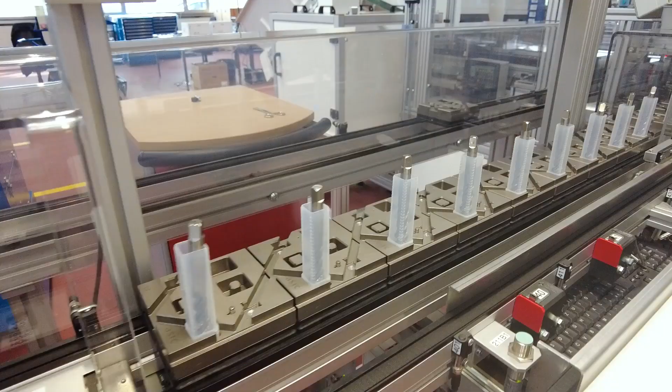Are there any closing statements, as my pockets have gotten real heavy today - I may or may not have snagged some of your stuff. But any closing statements you'd like to say, just in general about Fraisa, the company, the people, the products, and working with all the amazing companies out there, as well as inviting them to give you guys a try?

Yeah, thank you very much, Tony, for this wonderful feedback. That makes my heart really feel good.

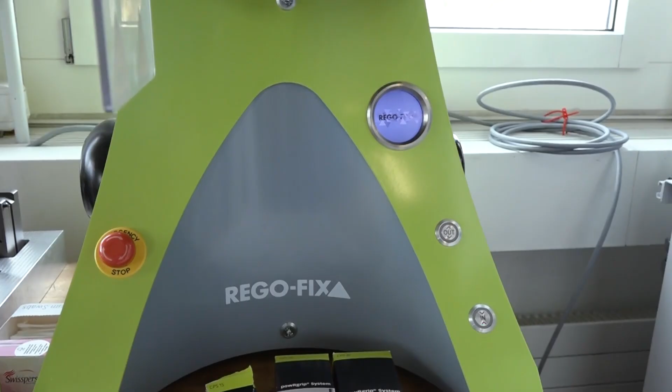And Tony, this is exactly what is the sense. So I go every day in the morning, I go to work - what is the sense to do that? For a long-term sense, that is making together a good story. Having partners makes a good feeling. Going together in the future makes sense to invest such a lot of time of our life for that story. And that is my intention, to do that day by day with my colleagues, with my partners, to create real success stories. That is also our culture, that we go on in this process, and there is still a lot of potential - I see still in the R&D a lot of potential. My buckets are filled with tasks, and I'm really happy and thankful that I can do that also in the future.

Would it be less manly of me if I cried from your passion? I mean, I'm an emotional person too, and your passion gives me chills - it makes me want to, just one single tear though, one tear.

Great, thank you so much. I'm very impressed. Thank you for all of that, it's been such a pleasure. I hope everyone that's watching has enjoyed this as much as I have.